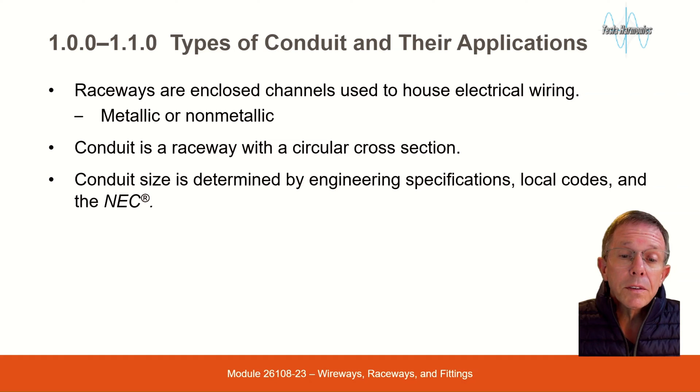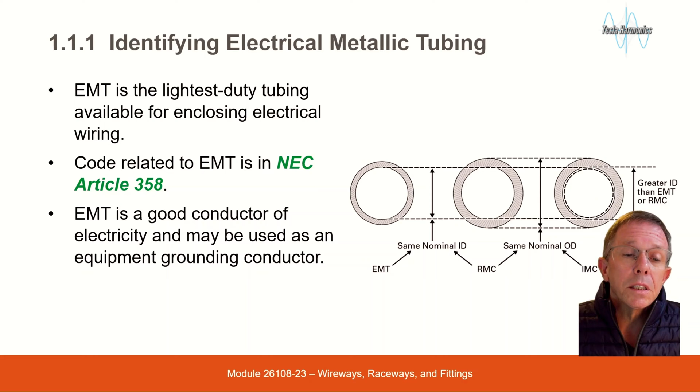Identifying electrical metallic tubing. EMT is the lightest duty tubing available for enclosing electrical wiring. Code related to EMT is in NEC Article 358. EMT is a good conductor of electricity and may be used as an equipment grounding conductor.

Identifying rigid metal conduit. RMC is thick enough to permit the cutting of threads. RMC may be steel or aluminum, stainless or galvanized, or enamel coated. Code related to RMC is in NEC Article 344.

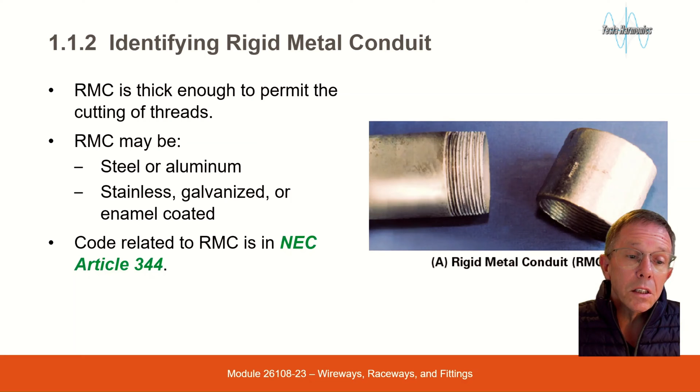Identifying plastic coated RMC. Plastic coated RMC is corrosion resistant with a thin coating of PVC. Plastic coated RMC requires special threading and bending techniques.

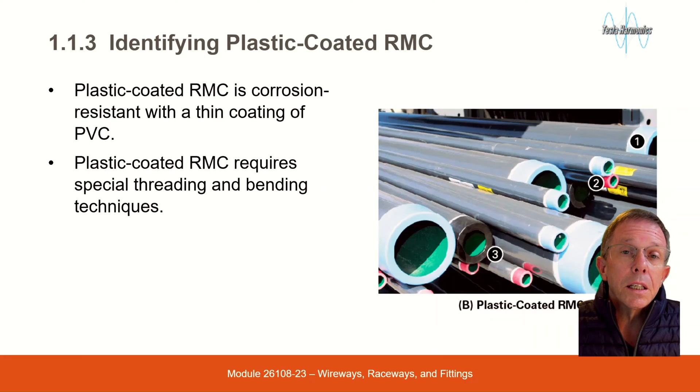Identifying aluminum conduit. Aluminum conduit resists corrosion better than steel. Used in areas that may be wet and where there are chemicals. Code related to aluminum metal equipment is in NEC Section 300.6b.

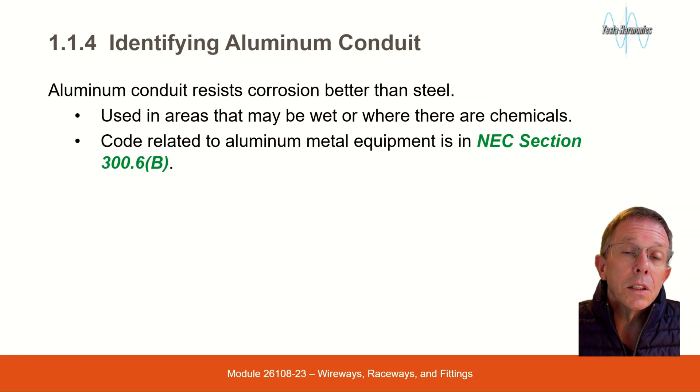Identifying black enamel steel conduit. Rigid black enamel steel conduit is steel coated with black enamel. Used in the past for indoor wiring, it is no longer manufactured in the United States but may still be found in existing installations.

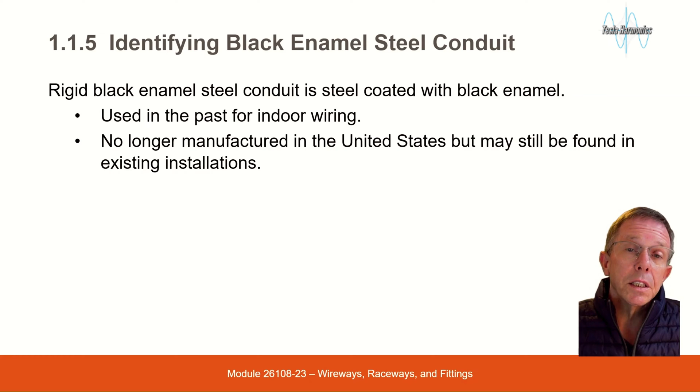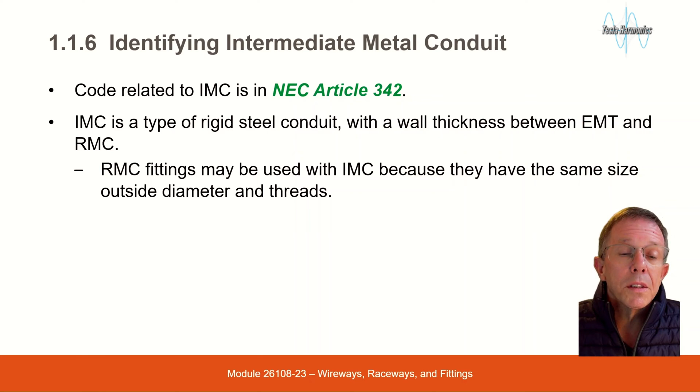Identifying intermediate metal conduit. Code related to IMC is in NEC Article 342. IMC is a type of rigid steel conduit with a wall thickness between EMT and RMC. RMC fittings may be used with IMC because they have the same size outside diameter and threads.

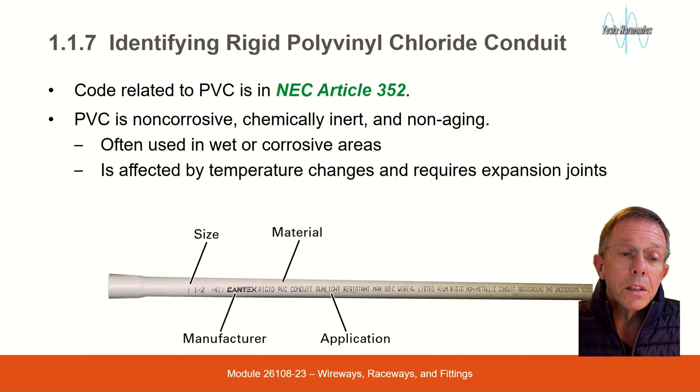Identifying rigid polyvinyl chloride conduit. Code related to PVC is in NEC Article 352. PVC is non-corrosive, chemically inert, and non-aging, often used in wet or corrosive areas. It is affected by temperature changes and requires expansion joints.

Identifying high-density polyethylene conduit. HDPE is an RNC, or rigid non-metallic conduit, listed for underground installations. It is suitable for direct burial or where encased in concrete. Code related to HDPE can be found in NEC Article 353.

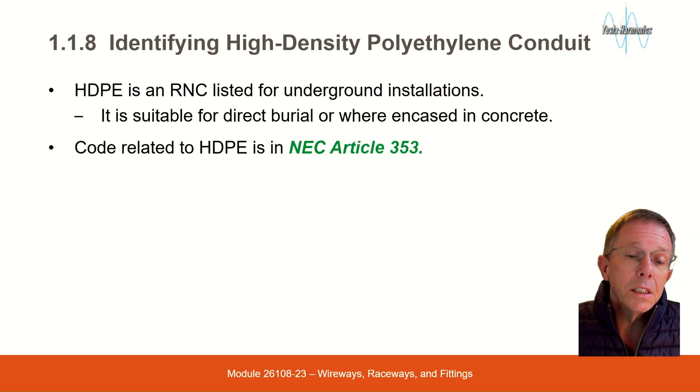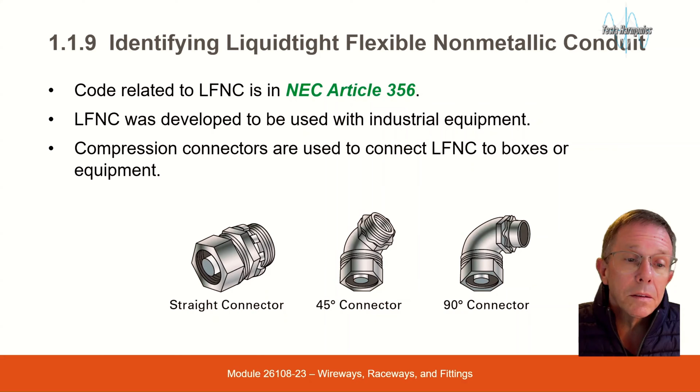Identifying liquidtight flexible non-metallic conduit. Code related to LFNC is in Article 356. LFNC was developed to be used with industrial equipment. Compression connectors are used to connect LFNC to boxes or equipment.

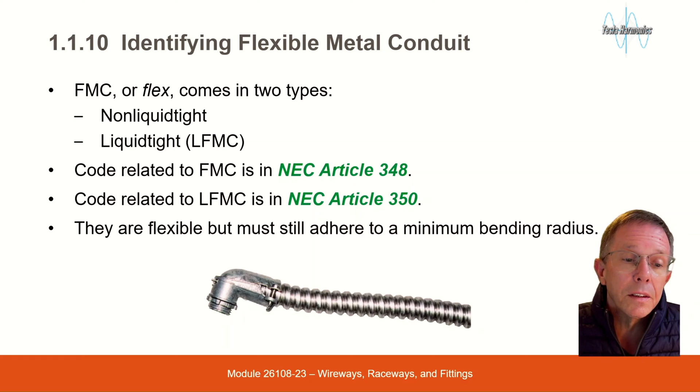Identifying flexible metal conduit. FMC, or flex, can come in two types: non-liquid tight, or liquid tight, LFMC. Code related to FMC is in NEC Article 348. Code related to liquidtight flexible metal conduit is in NEC Article 350. They are flexible but still must adhere to a minimum bending radius.

Bonding conduit. Most equipment with a metal frame that receives electrical power is bonded. The metal frame is connected to the grounding point. Bonding provides a low resistance path to ground. Connection is made with a wire or to a metal conduit or raceway system. Code related to bonding enclosures can be found in NEC Section 250.96.

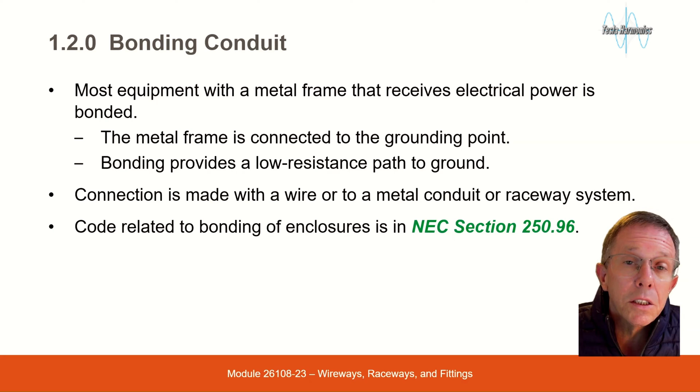Couplings. Couplings are threaded inside and are used to join male threaded pieces of RMC and IMC.

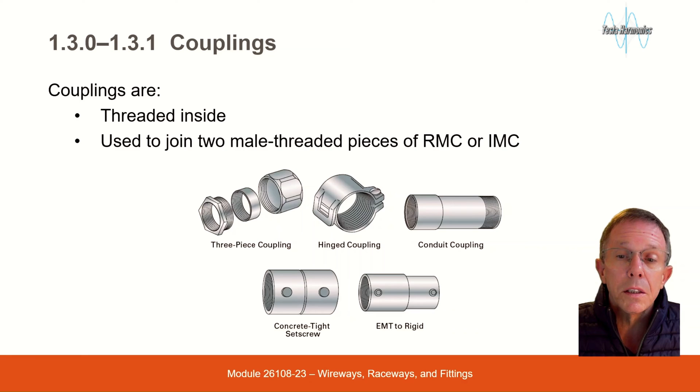Insulating bushings. Bushings are installed on the threaded end of conduit that enters an enclosure. They protect the wire from being damaged by sharp edges. Grounding insulating bushings protect conductors and allow for connection of an equipment grounding conductor.

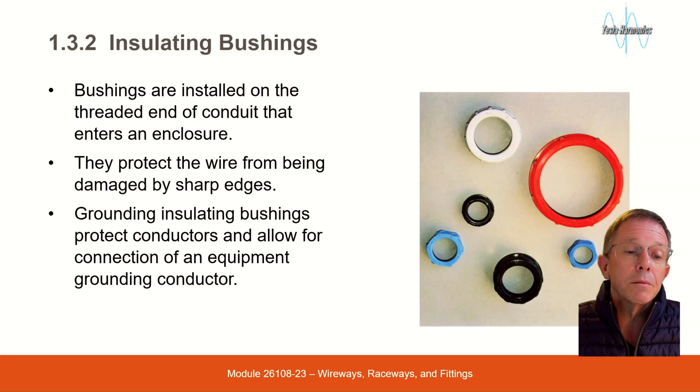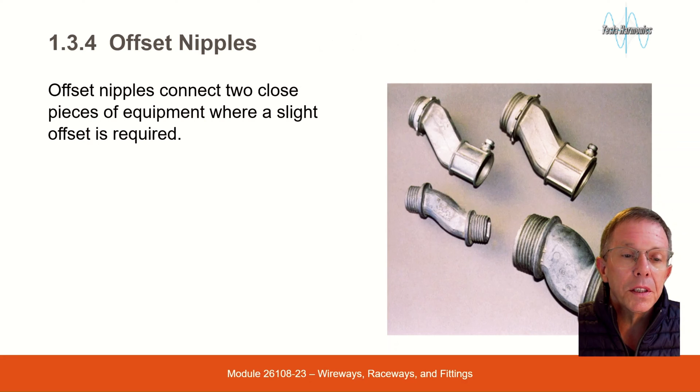Threaded weatherproof hubs. Threaded weatherproof hubs are used in wet locations. Offset nipples connect two close pieces of equipment where a slight offset is required. And conduit bodies. Conduit bodies allow access to conduit through a removable cover.

There are multiple types of conduit bodies: type C, type L, type T, and type X. They come in different configurations to allow for changes in different directions.

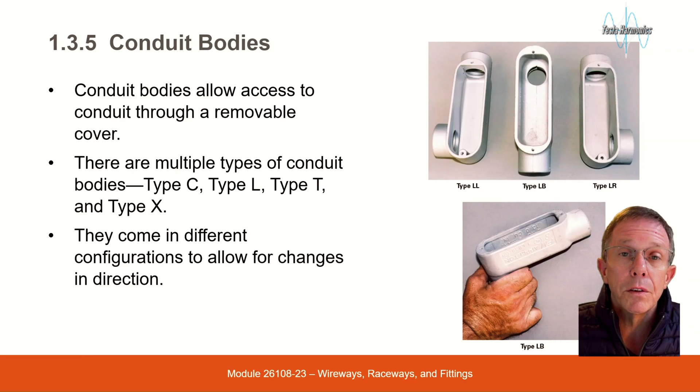Sealing fittings. Sealing fittings are required for conduit in hazardous locations where explosions may occur. Making a conduit to box connection. Conduit is joined to boxes by connectors, adapters, threaded hubs, and lock nuts.

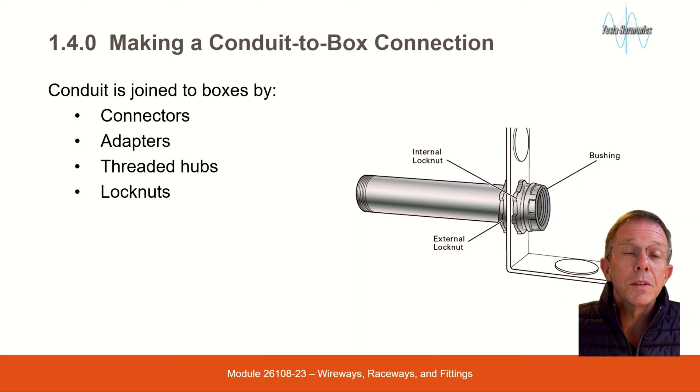Straps. Straps are used to support conduit to a surface. Spacing must follow the requirements for each type of conduit. Standoff supports. Standoff supports are used to hold conduit away from a structure.

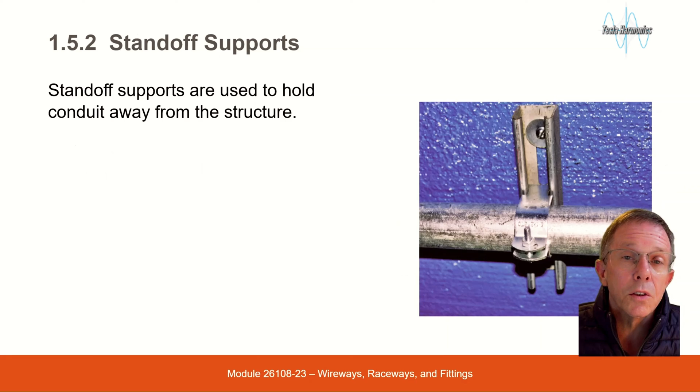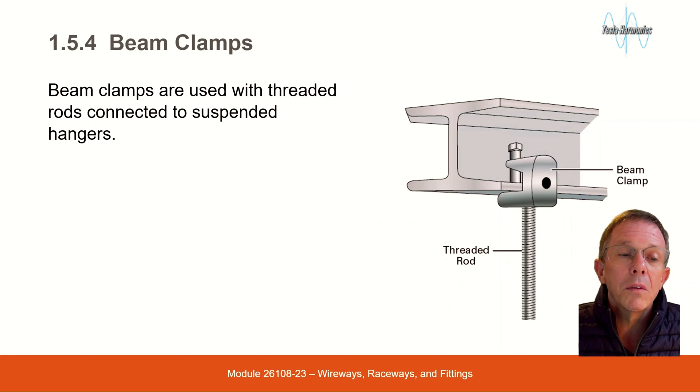Electrical framing channels. Electrical framing channels are used with conduit clamps to support conduit. Beam clamps. Beam clamps are used with threaded rods connected to suspended hangers.

Working in masonry and concrete flush mount construction. Conduit and boxes must be embedded in the concrete to achieve a flush surface. With masonry walls, the electrician must work closely with the mason.

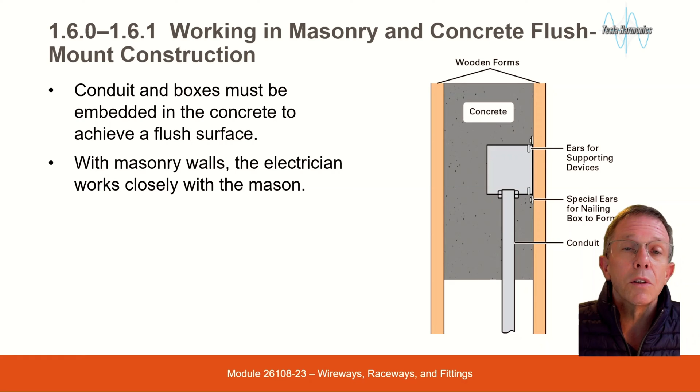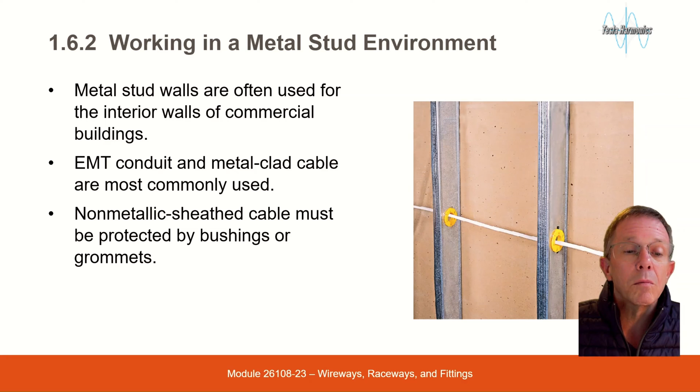Working in a metal stud environment. Metal stud walls are often used for interior walls of commercial buildings. EMT conduit and metal-clad cable are commonly used. Non-metallic sheathed cable must be protected by bushings or grommets.

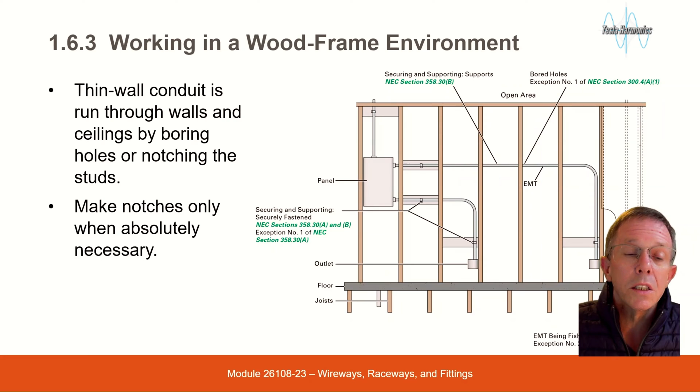Working in a wood frame environment. Thin wall conduit is run through walls and ceilings by boring holes or notches in studs. Make notches only when they are absolutely necessary.

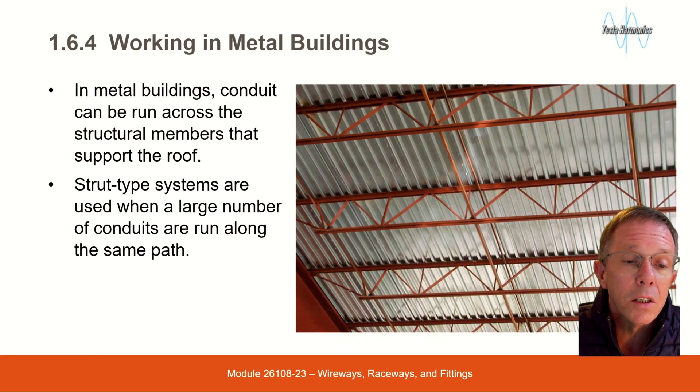Working in metal buildings. In metal buildings, conduit can be run across the structural members that support the roof. Strut type systems are used where a large number of conduits are run along the same path.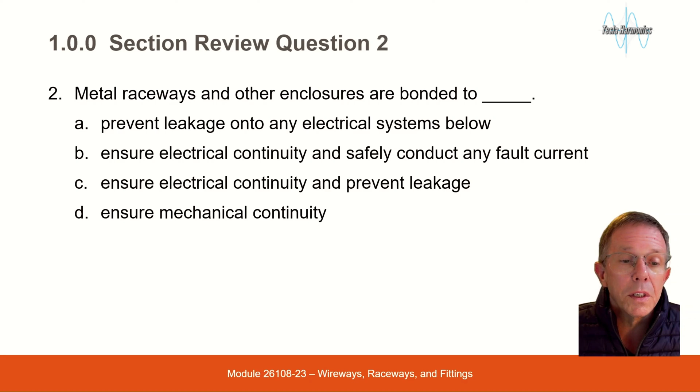Metal raceways and other enclosures are bonded to prevent leakage onto other electrical systems, ensure electrical continuity and safely conduct any fault current, ensure electrical continuity and prevent leakage, or ensure mechanical continuity. And that would be: ensure electrical continuity and safely conduct away any fault current.

A fitting that does not require support is: an outlet box, a pull box, a junction box, or a conduit body. And that would be a conduit body.

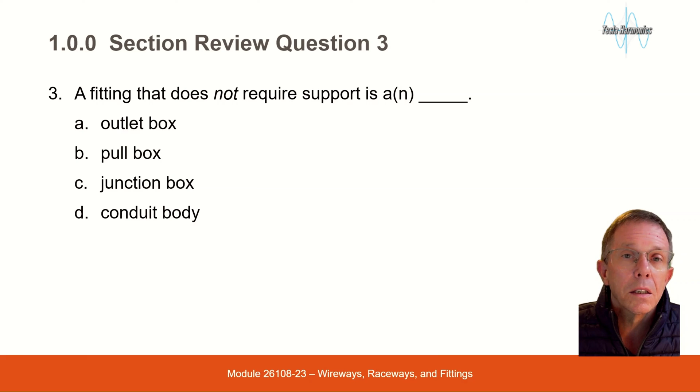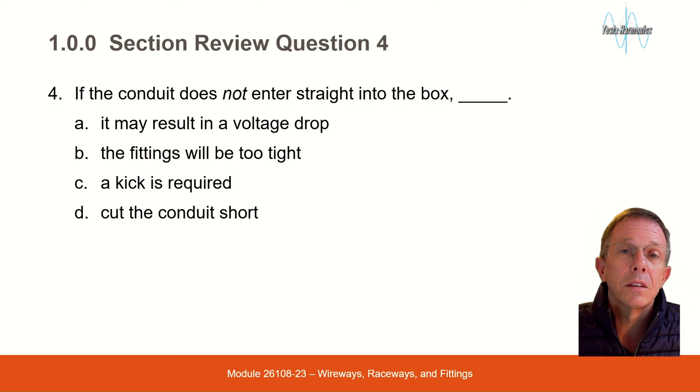If conduit does not enter straight into the box, it may result in: a voltage drop, the fittings being too tight, a kick being required, or cutting the conduit short. And that would be a kick is required.

Beam clamps are used with straps, standoff supports, framing channels, or suspended hangers. And that would be suspended hangers.

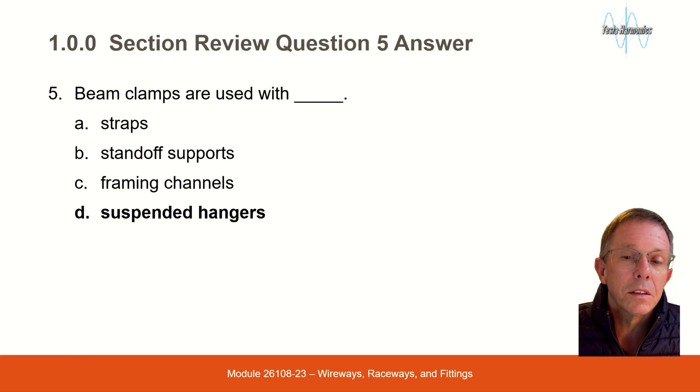When the mason is constructing a block wall and the electrician is installing conduit into the voids of the block wall, what lengths of conduit would be best for allowing the mason to maneuver blocks over the sections of the conduit? 3 to 5 foot lengths, 6 foot lengths, 8 to 10 foot lengths, or 20 foot lengths. I think that would be 3 to 5 foot lengths.

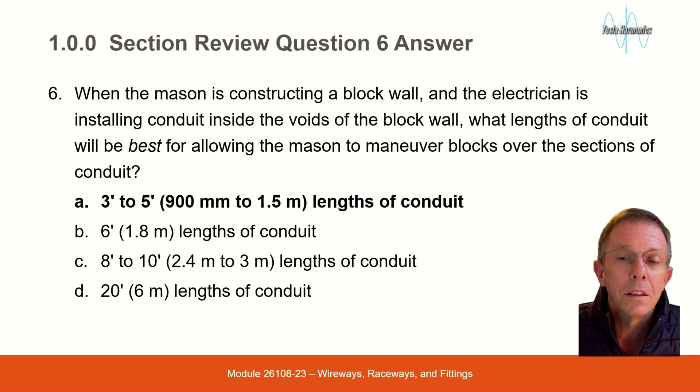Alright everyone, that was it for that section. The next section will be 2.00, Fasteners and Anchors for Raceway Systems, and I'll see you over there.